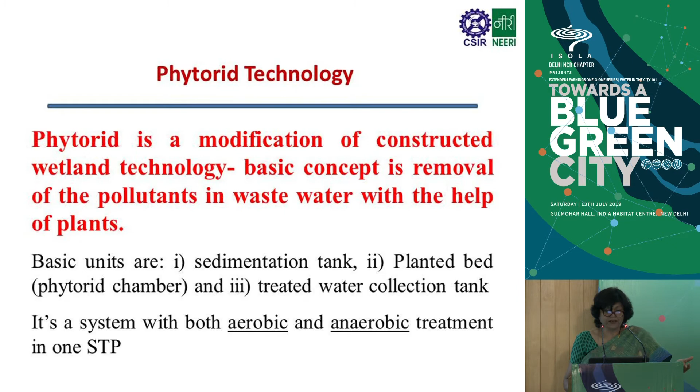This is a schematic of the phytorid system. As you can see, the sewage here is fed into the sump, which goes to the settling tank. This is necessary for settling and sedimentation of the solids which are settleable, and then it goes to the phytorid bed, which consists of subsurface flow and a scientifically layered bed, and then the overflow goes to a treated water tank, and further it is disinfected, and it can be reused for irrigation in gardens and farms.

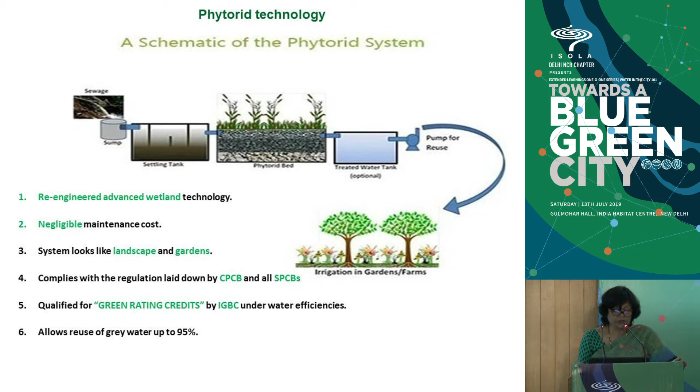Nowadays we are also introducing adsorption beds. After this we have sand and activated carbon to meet the new norms that are coming in place with this NGT order. It has a negligible maintenance cost, it looks like a landscape and garden, complies with the regulations laid by the Pollution Control Board, qualifies for green rating credits by IGBC under water efficiencies, and allows use of grey water up to 95%.

Application areas can be small colonies, even apartments, townships that are coming up, hotels, municipal schools, municipal councils, education institutes, schools, colleges, railway stations, and public toilets.

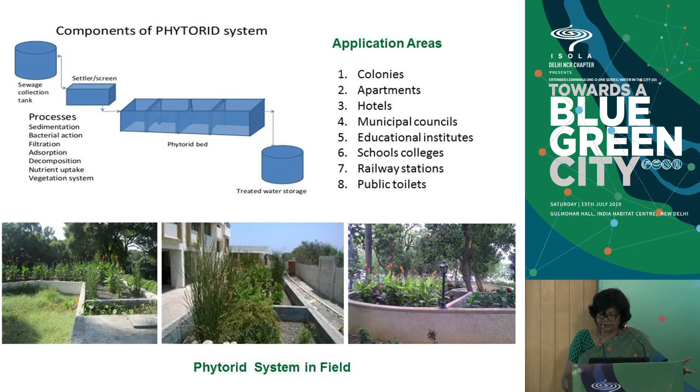The contaminant removal mechanism in phytorid is the reduction of biochemical oxidation of organics, nitrification and denitrification, and the phosphate uptake, which is taking place by the plants itself. And the anaerobic treatment zones are at the bottom.

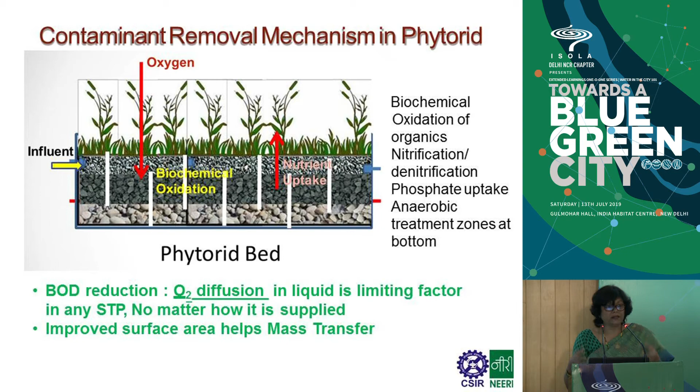In any STP, the BOD is the measure of organics in the wastewater which are biodegradable, and this is the parameter of prime importance while you're designing, and in the treated effluent you have to measure this, and this is the parameter which I was saying is now less than 10 as per the NGT order. So BOD reduction is because of oxygen diffusion in liquid, which is the limiting factor in any STP, and that is what controls the mechanism of removal of BOD.

The kinds of plants that we can put on the bed of the phytorid are the bulrush, the nutsedge, the canna, the cattails. And this is a picture of the phytorid plant existing in Mahindra Igatpuri. It's of 60 cubic meters per day. And this is what it looks like. When you see the influent and effluent, you can see the clarity in the water, and it meets the standard of suspended solids, COD, BOD, nitrogen, and phosphorus.

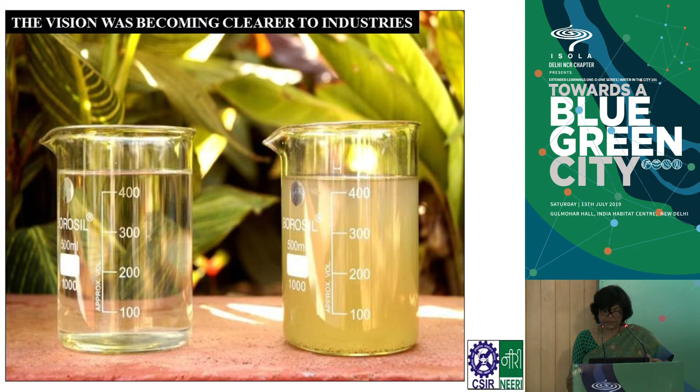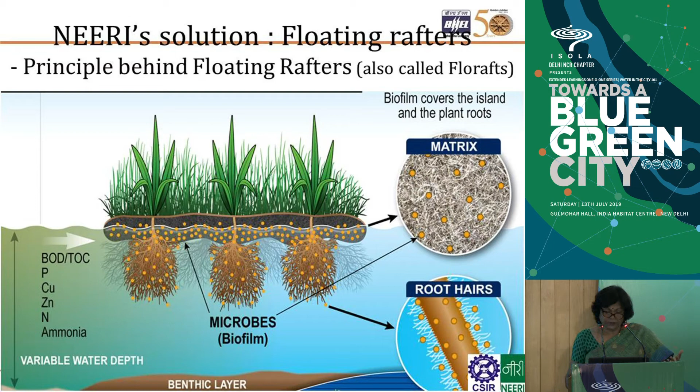We come to enhanced in situ drain treatment, which we were talking about. Ma'am has just shown you what is the problem when you have the drains and it is not monitored, and it is a no man's land actually, and the slums and the dhobi ghats and everyone just think that it is a place where you can dump your solid waste or liquid waste, or even the cow dung, or anything. We have experienced all kinds of things, and so we were very fortunate that we were given a project in Prayagraj where we have installed this in 6 drains.

And it all started in NEERI with a dream of our director, Dr. Rakesh Kumar, who wanted to see this drain which was running inside NEERI to be treated, and then if we could use the treated water for the plants inside our NEERI. So it was a pilot plant which was run successfully, and we named it Restoration of Nala with Ecological Units, and its name is RENEW. So I will not talk about the background and need for treatment. Ma'am has already talked about it.

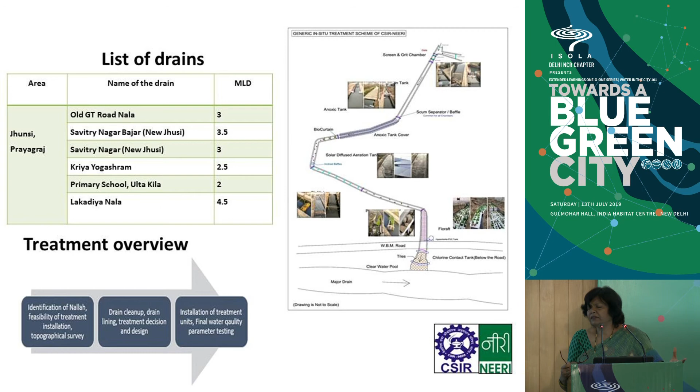So what are the units that we have? It's just like an STP. We have the screen and grit chamber, then we have the sedimentation tank. We have introduced an anoxic tank over here, which is a wonder and it works very well. Then there are biocurtains. We have a specially designed microbiological solution which is put on these curtains, introduced into the drain, hanging on top. And then we have the floraft and the phytotraps. And in the last unit, just as the treated water flows out, we give a chlorine contact time of about half an hour, and then it is allowed to flow into the river. So we don't have any microorganisms flowing out of this drain.

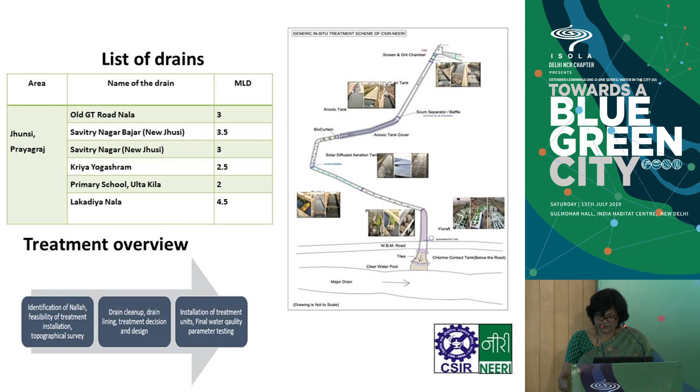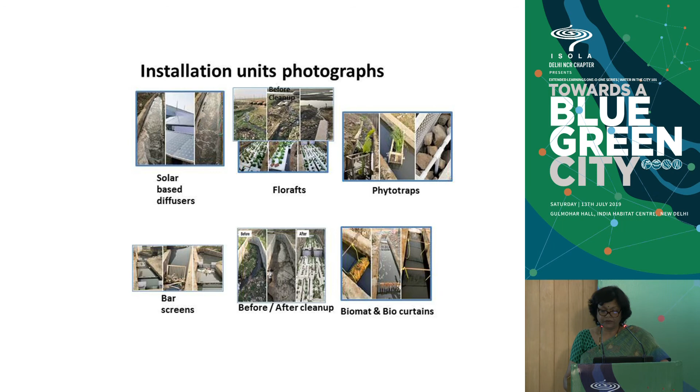So these are some of the pictures, and I forgot to say there is an aeration unit also, and it's absolutely natural because it is going to run on the solar panels. And there are florafts that are using the same plants that we are using in the phytorid also. And then we have the bar screens you can see down on the extreme left. And you can see the picture of before and after cleanup, how beautiful it looks.

So in this we promise about 60% reduction in BOD. We are not promising 10 BOD here. We are saying that if we do the treatments of this, we can't predict what will come in the drain. So there is no equalization, and sometimes suddenly there is a shock load because some dhobi has done something, or some cattle people have thrown their dung into this. So we promise about 50 to 60% reduction in BOD, and definitely in suspended solids we are saying that we will get about 90% removal of the suspended solids.

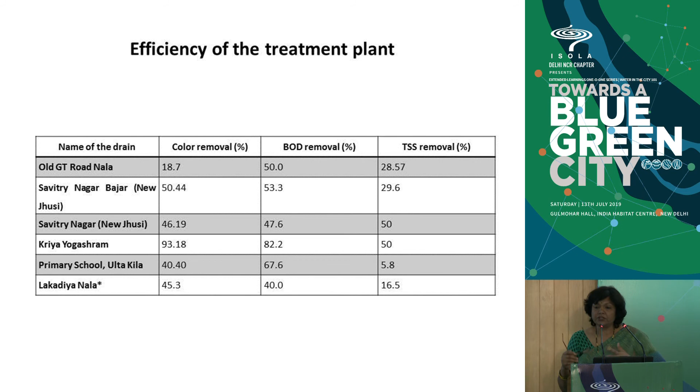And this drain was monitored by another institute. It was not done by us, for National Mission of Clean Ganga, and all the results were open to the public, and we got 20 BOD. So that was the success story. This is over there. Yeah. It is about 120 or sometimes 210. It depends from time to time. It is a public document and it is present on the IITR website, Lucknow. So this was of course tweeted by Nitin Gadkari ji, so we like to put it in our presentation. And this is the one that is existing already in NEERI.

So this is the project which I have now. It is a DST sponsored Pani Water project. I just wanted to put it over here because apart from the contaminants which we talk about, there are contaminants which are not visible and not being regulated, and these are the contaminants of emerging concern. They are called CECs. And what are they? They are antibiotics, pharmaceuticals, personal care products, endocrine disruptors, steroids, hormones. The health effects of all these contaminants are not known, but they can give you antibiotic resistance in the body, which is why people don't react to the antibiotic doses which they were reacting to previously. We require higher doses. It gives more opportunity for the drug industries to have more business now.

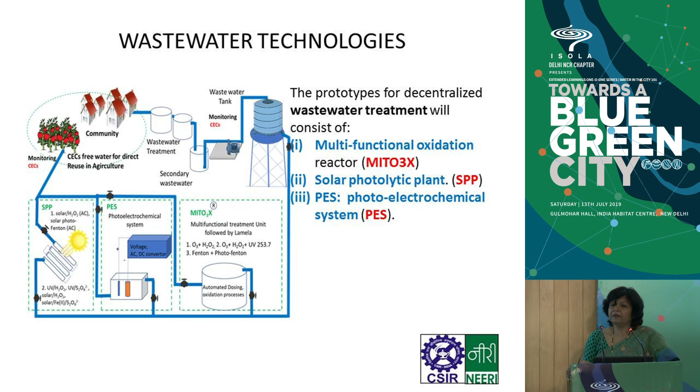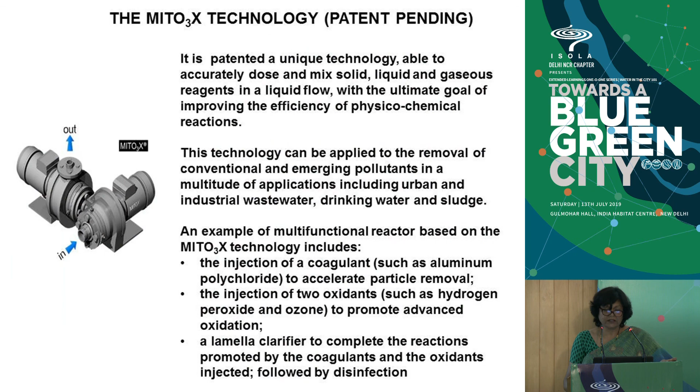And as you can see, we have this association with Aquasoil Italy and also Spain and many countries. And in this association, we are co-creating a technology called MITO3X. And we are looking for a demonstration site. It will be 100 cubic meters per day, and the land that we require will be about 10 by 10 meters. So if anyone is interested, please contact me. It is an integrated decentralized treatment which will consist of coagulation, sedimentation, ozonation, and hydrogen peroxide. And the treated water we promise will be fit for agricultural reuse, with very low maintenance and low electricity consumption, and reduced sludge volume. So drinking water technologies I'll not talk about, and this is what the demo plant will look like.